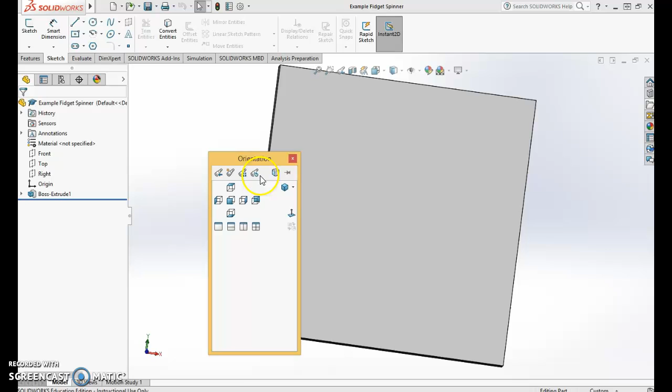Alright, this is video 2 of our fidget spinner fun. So now we have our basic shape that we're starting out with, just a square that you guys made last time in video 1. Now we're going to add a little bit more to it, because as you guys know, a fidget spinner is much more than just a block.

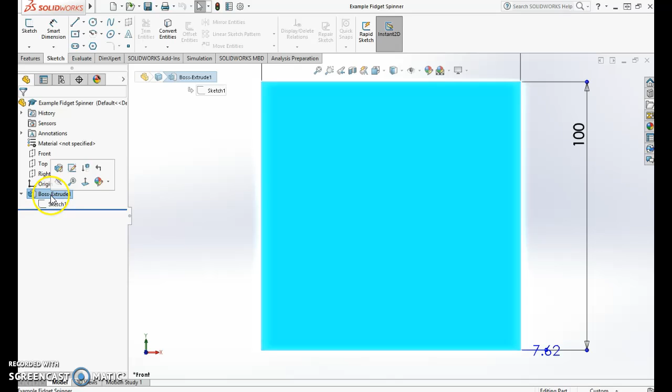The first thing we're going to start with is our hole directly in the middle, where the bearing is going to go. Click directly on this face and it's going to highlight blue, which means you're in that sketch. You can see it highlighting over here, and that this Boss Extrude piece is what I'm editing now.

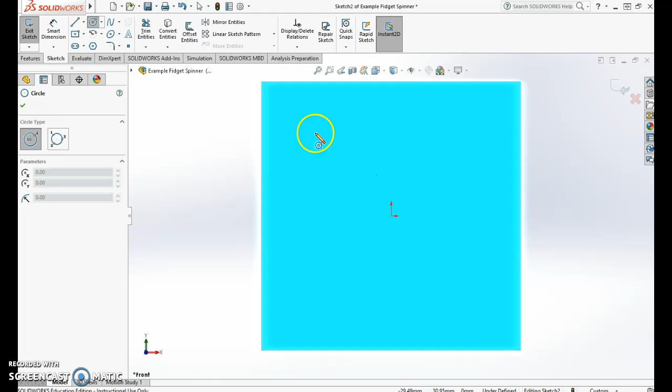Our bearing is a perfect circle, so we're going to click on Circle and use that same snap feature we used last time. My mouse has a little pencil with the circle below it, so I know I have the right tool. If you hover over the origin, you'll get that yellow mark, which is exactly what we want. I'll hover over it, it'll snap and give me the go-ahead sign, and we'll draw our circle. That's step 1.

Remember, we always have 3 parts to doing things in SolidWorks: we create a sketch, we add dimensions to it, and then we either cut or extrude that piece. So we have our sketch created.

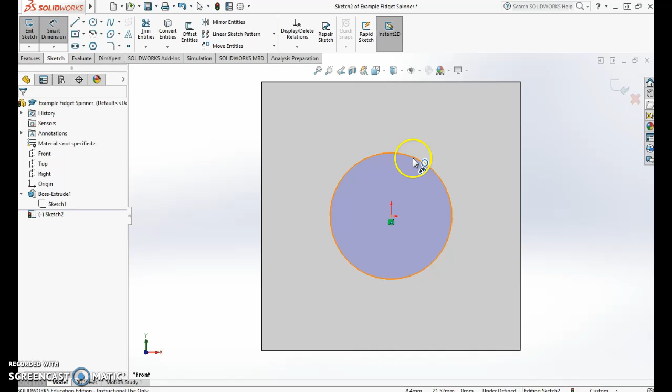Our next step is to go into Smart Dimensions, click on the perimeter of that circle and click off, and it's going to allow us to modify that distance. What we want here is 22.4 millimeters—you can type that directly into the box, hit the check mark, and it'll size it for us. Now I have a pretty good sized bearing hole with a dimension.

Sketch completed, Smart Dimension completed.

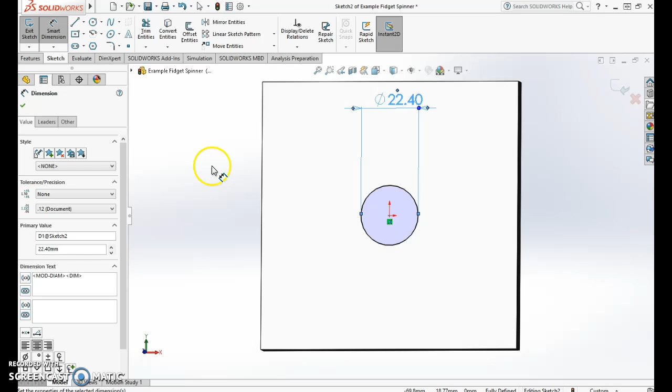Now we just need to cut or extrude that piece. I still have my Smart Dimension selected, so I'll hit Escape and go to Features. Last time we used Extruded Boss Base, and now we're going to do something called Extruded Cut. With the piece still selected, I'll click Extruded Cut—whenever we extrude something, that's adding material, and whenever we cut something, that's removing material. We want to make sure this cut goes all the way through.

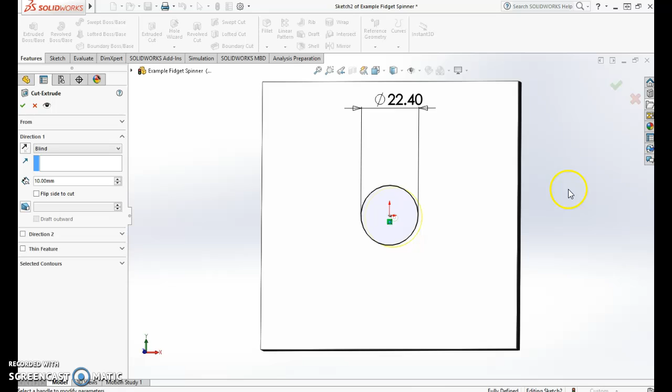We can see how it's lined up over here. Right now it's called a blind cut, which goes up to a certain point, whichever face you want it to. What we want instead is through all, so the hole punches all the way through our fidget spinner.

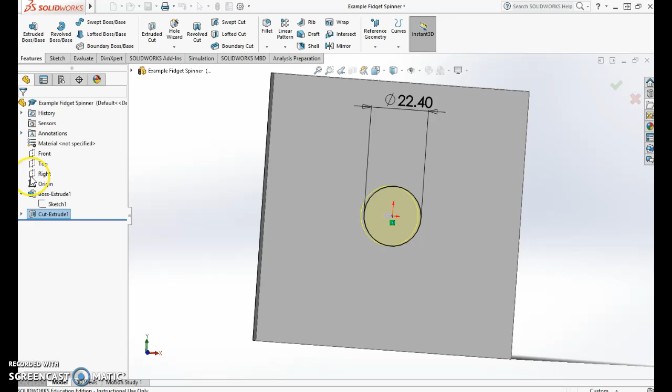We wouldn't want just part of the bearing exposed, because you have to put your thumb and your pointer finger on the other side, so we want to make sure it goes through everything we're cutting here. I have Through All selected, and I'll hit the check mark—that's our final piece. Now we have our bearing hole cut into our fidget spinner. That was step 2.

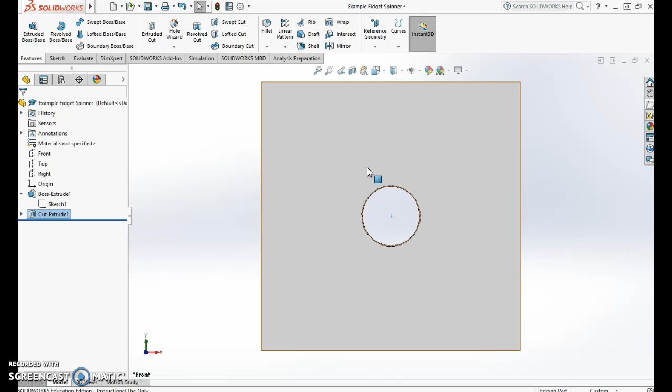Now if you guys have really cool fidget spinners, like many of you do, you'll notice there are also some weights around the other side. The weights we're going to use for this design are actually just a common hex nut—a 6-sided figure that adds some weight to your spinner to make it spin more smoothly. If we click on the left, right here on the plane, we get it highlighted again.

We're going to start by adding a sketch, so I've got to go back to my sketch. We're using this polygon tool—this polygon is a 6-sided figure, just like our hex nut. So we're going to click on our polygon.

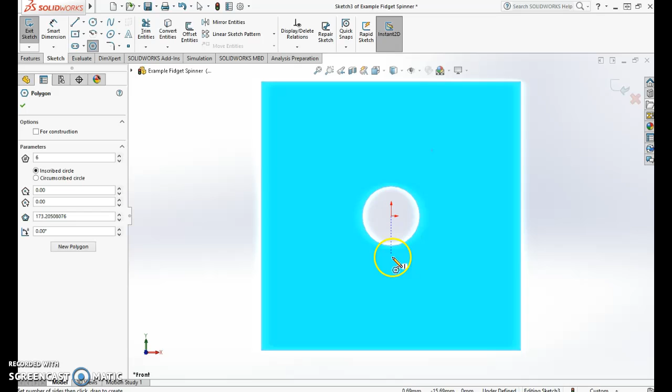This is a cool feature of SolidWorks—if you hover your mouse over, you'll see the circle under my pencil, so I know I have the right piece again. If you hover over the origin and get that snap tool, it'll align it with the origin. You can see that black line just to the right of my pencil, which means it's directly in the middle of that circle and exactly where I want it.

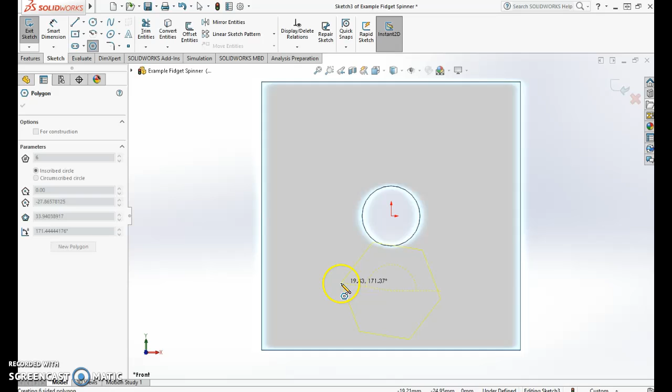I'm going to left click once and drag out this hexagon. It doesn't really matter where it goes, you can spin it around, but we're going to align it later. I'm going to put it a little off center — not quite what we want. I still have my hexagon selected, so I'll hit escape.

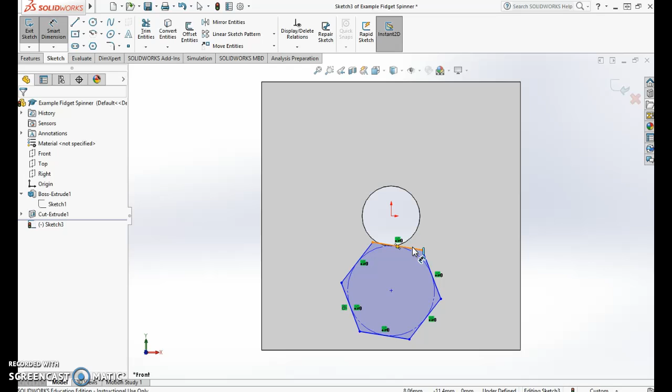Now that we have a sketch created, we need to add a dimension. I'm going to go to Smart Dimension, but this one's going to be a little different — we're going to do two clicks on this one. Hex nuts are measured by how long they are, or what their diameter is, so you can do a Smart Dimension for a diameter. If I was just to click once here, that's going to give me the length of that side.

But I don't want the length of that side — I actually want the length, or diameter, of the whole hex nut. So I'm going to click right here, and you can see my dimension changed. Now it's telling me how far across that is. I'll click one more time off, not on any of the lines.

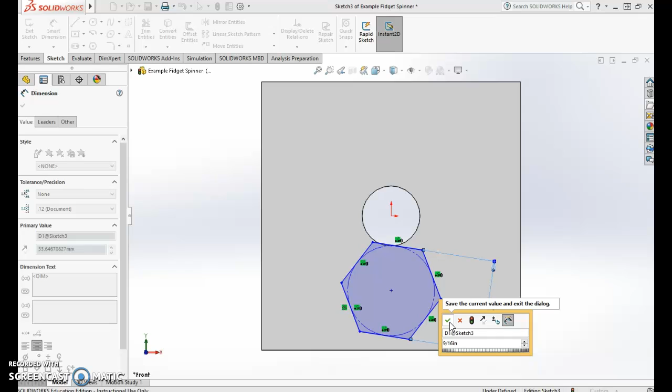I'm going to put 9, and the slash means divide, so I'll do 9/16, and we're going to do inches on this one. Make sure you do inches — this is a little different than what we've done before, since everything else has been metric. So we're changing it up just a little bit: 9/16 inches, and it's going to populate that spot for us.

I still have my Smart Dimension highlighted, so I'll exit off that, and now I have my dimension. So now I have my polygon right there on the front, but you can see it's a little wonky — we don't really like that. We want this to be aligned perfectly.

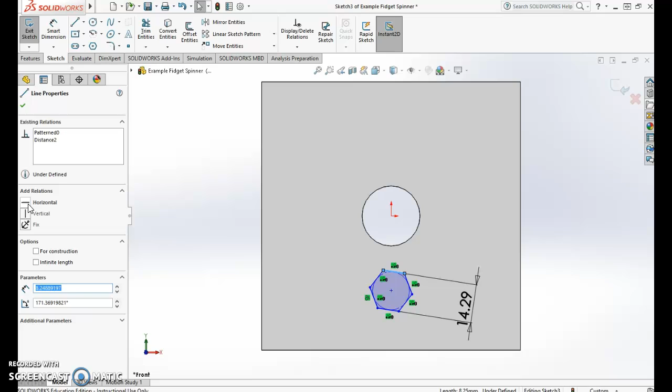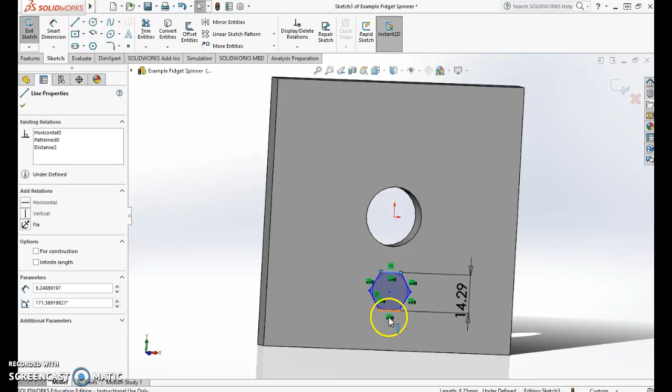If you click one of the edges here, you can add what we call a relation. Over here to the left, you can add a horizontal, vertical, or fix that position. We're going to do a horizontal relation, and as soon as I click that, you can see it lined up with my bearing. Now we've got a perfect bearing, lined up perfectly parallel with our hole, because we want to make sure it's the same distance away. So we've got a good spot here — my circle is right in the middle, and our polygon is right in the middle of this space as well, which is exactly what we're looking for.

Now what we have to do is recreate that, because your fidget spinner is perfectly symmetrical. Anytime we have to do symmetry, SolidWorks has a feature where you can reflect things across an axis — we're going to be doing that, and I'll warn you, this part is a little tricky, so make sure you're paying attention.

I'm going to go ahead and check that our line is there — we're pretty happy with that. We're going to add what we call a center line. If you click on this little chevron and go to center line, it's going to allow me to draw a line, and it's going to look like this dashed kind of line. So now we have this dashed line.

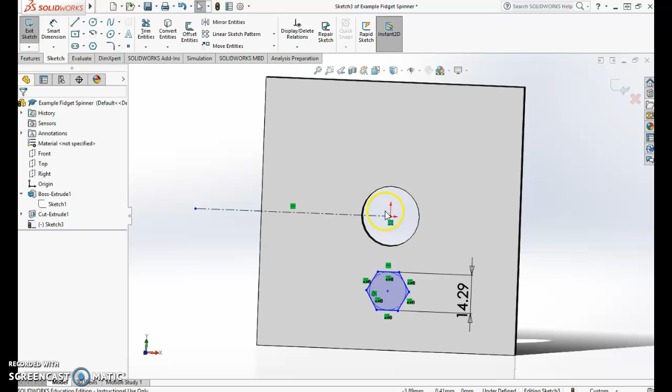Now this is where it gets a little tricky. I'm going to left click and drag, and I highlighted this hex nut that we added. I have everything highlighted in there — you can see all of those pieces are selected. Selected entities is just like the things that have been selected.

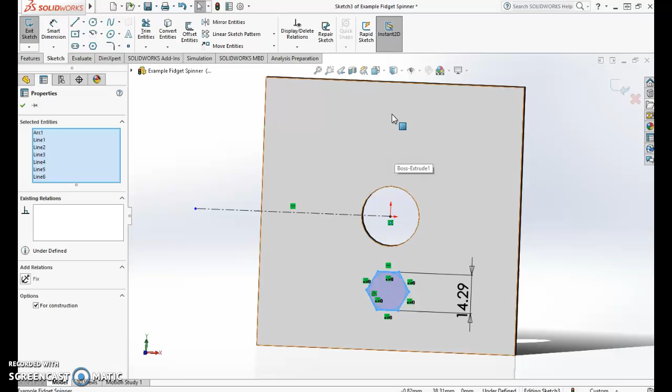So now we're going to go to this button, called Mirror Entities. Mirror Entities is exactly like what it sounds — it's going to reflect something across an axis and duplicate that on the other side, so it's perfectly symmetrical. If I was to just come in here and drop another polygon up here, it would be really challenging to make sure the distance from the perimeter of this circle to the edge of this hex nut is the same as this completed one. So by using the Mirror Entities tool and reflecting this piece over, we make sure our fidget spinner is perfectly symmetrical.

So I have my center line, I have my hex nut created with a dimension. Now we're going to click this Mirror Entities button. You can still see my entities to mirror, all of those pieces are still selected. If I go right here where it says Mirror About, I want to reflect it over this line.

Oops, didn't like that. Let's get rid of arc and see if that helps. Yep. So when you guys are checking your entities to mirror, you'll notice that mine said arc as well.

So the arc is this circle right in the middle. We don't want that selected. Before you reflect your piece, make sure your entities to mirror only say line 1 through 6 - I have line 1, 2, 3, 4, 5, 6. If you have this arc piece, it says arc 1 here, that will not reflect properly. So we're going to click on arc 1 and just hit the delete button, and it's going to unselect that for us, which is exactly what we want.

So now we have all of our lines selected. We're going to click this mirror about box. It's going to highlight blue so that way we know we're on it. And you're going to click that line, that center line that we drew.

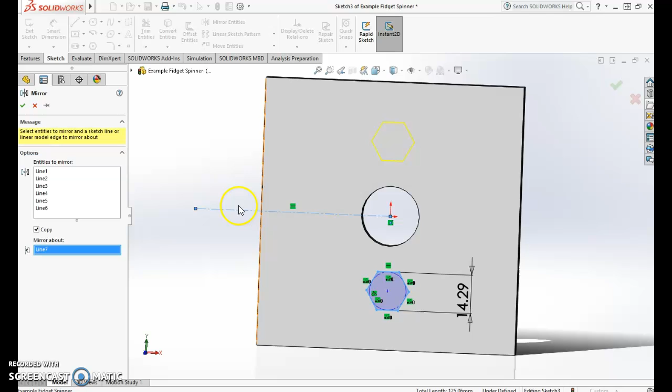This center line actually isn't going to show up in our design. It's just used for drafting, and we only use it to reflect this piece over. So don't worry about this line showing up later - you're not going to have this weird stringy piece of plastic coming off your fidget spinner.

But now that we've reflected that, we'll just hit OK. And you'll see we have two perfectly spaced hex nuts that are the same distance from that middle circle bearing. So that's exactly what we're looking for. We've created our sketch, we have our dimension on here, and then we just reflected this across the axis.

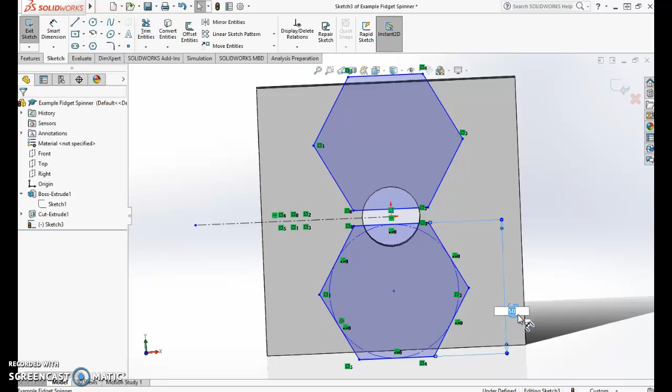So we actually don't need to add a dimension to this because our dimension's down here - this is exactly the same. If I was actually to change this, let's make it really big so you guys can see. If I was to change that to 20, you can see that it actually changed my reflected piece as well. So I can make this 50, whatever the case may be, and it'll change with whatever I mirrored. It's kind of nice if you mirror things that they all change proportionally and congruent with one another.

But I'm just going to change this one back to our measurement, which was 9/16 - so 9 divided by 16 inches. And it's going to give us this piece. So now we have our sketch, we have our dimension.

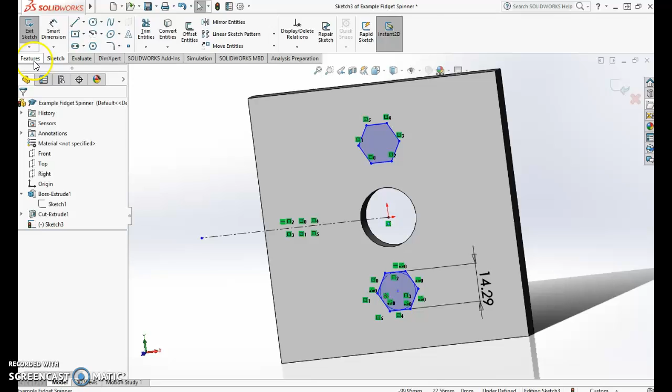We're going to go into features and we're going to do an extruded cut. This is the same feature we used last time to cut that hole for our bearing. So if you just do the extruded cut, you're going to go through all, and you're going to notice that you can see this yellow part - you can always check your work to make sure you're doing it properly. This yellow is the projected cut, so that's where it's going to cut to. So we went through all, we're going to hit the check mark because we like what we've done.

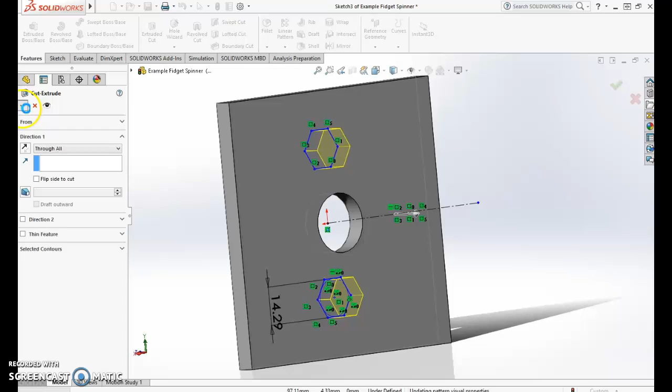And now we're going to have these two hex nut holes for our weights, and now we have a center bearing hole as well. But these are perfectly equidistant. So those are the main steps.

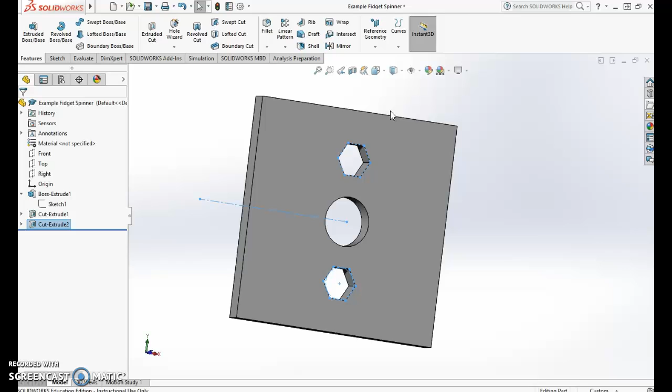There's still some design pieces that we will talk about in our next video. But if you look at this, we have all of this extra chunky stuff, and our fidget spinner doesn't look very cool if you ask me. It's just kind of a square and it's not very fun - it'd be really chunky in your hand, really hard to spin, so a square isn't what we're going to end up with. In the next video, I'm going to show you some design pieces on how you can remove some of this material, and it'll help you add your own touch, your own flair to your fidget spinner. By cutting away that material, you get to make it uniquely your own, so it's not just this generic square shape.